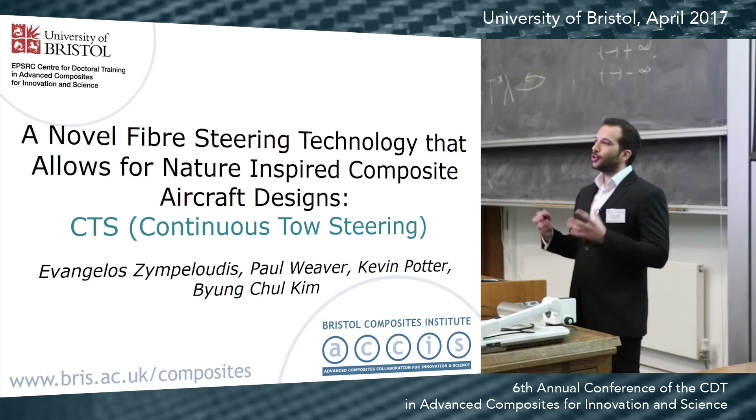All right. Hello, everyone. My name is Evangelos Zympeloudis, and the topic of my presentation is on CTS, or continuous tow shearing, which is a novel manufacturing process which expands the overall design space for composites.

Now, as you all know, composites are only strong in the fiber direction, and we compensate for this in order to give sufficient strength in all the critical directions by stacking layers of straight fibers together. But if you look at nature, we hardly see any straight fibers. What you see here is articular cartilage, a high-tech composite found within our bodies, where, as you can see, not only the density, but also the orientation of the collagen fibers constantly changes in order to adapt to the complex loading condition.

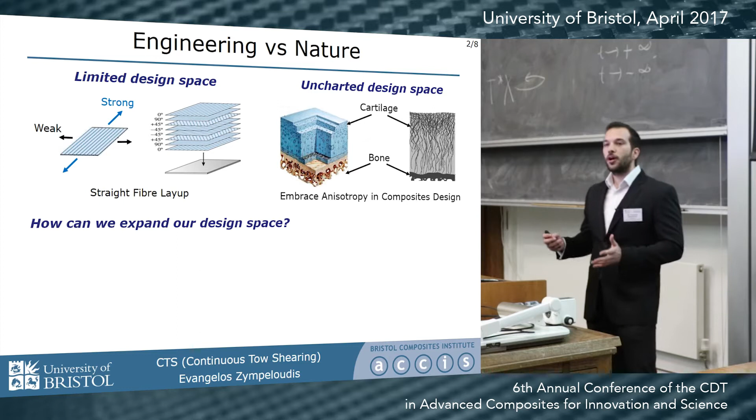Could we then design structures like this, structures which mimic nature and would allow us to improve the efficiency of our components? Well, the first step in doing that would be the ability to control the path of the fibers, something known as fiber steering. Now, fiber steered designs could yield significant performance benefits. For example, what you see here is a fiber steered wing skin, where the optimally steered paths could distribute the load directly onto the wing stiffeners and thus achieve a weight reduction of approximately 10%.

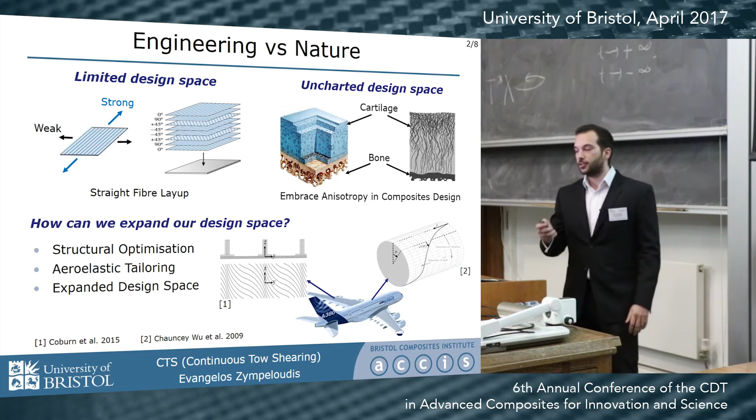Furthermore, as fiber steering allows us to tailor the stiffness of a structure at any given point, it makes it possible to aeroelastically tailor aircraft structures. More importantly, however, since this is a new field in structural engineering, we haven't yet fully explored the expanded design space that it opens.

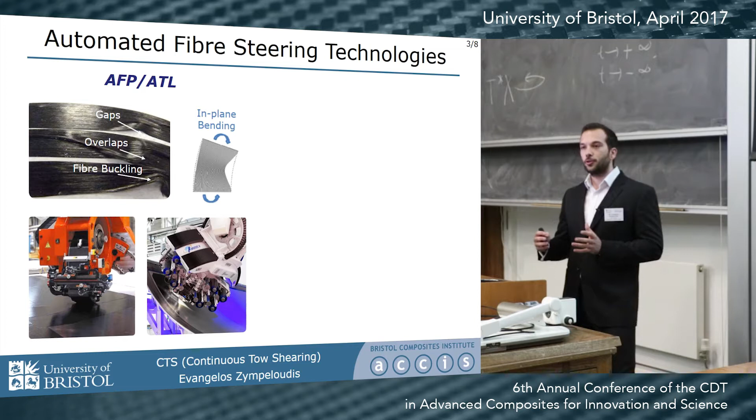Now, this is all great, apart from the fact that modern placement machines cannot produce such optimized designs. And to understand this, we would have to look at the current state of the art in composites manufacturing, the automated placement machines, which basically place bundles of fibers on the surface of a mold using a material deposition head. Now, although these machines are excellent at laying straight lines, they have very limited steering capabilities. And the reason is that they try to bend the tapes in order to steer the path, and this creates buckling, and buckling leads to all sorts of defects.

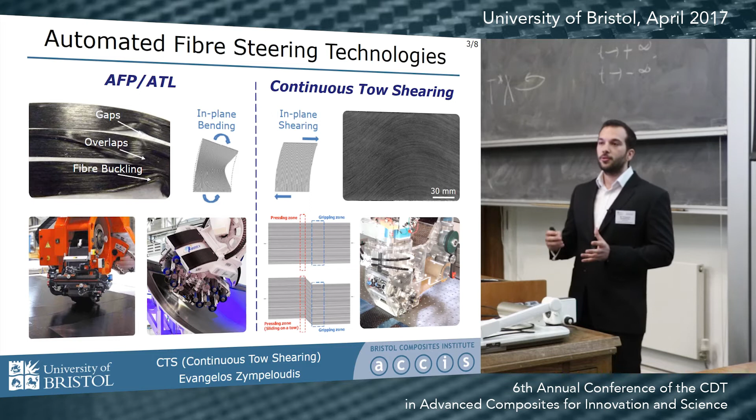Now, to overcome these manufacturing complications, the concept of continuous tow shearing was developed here at the University of Bristol by Eric Kim. Now, CTS exploits the material's shear deformation in order to steer the fiber path and results in no buckling and no defects whatsoever. So since conventional machines rely on bending, there is a strong coupling between the material width and the minimum steering radius. This is the radius that can be achieved without the introduction of significant defects. Basically, what this means is that for AFP and ATL, the narrower the tape, the better the steering capabilities.

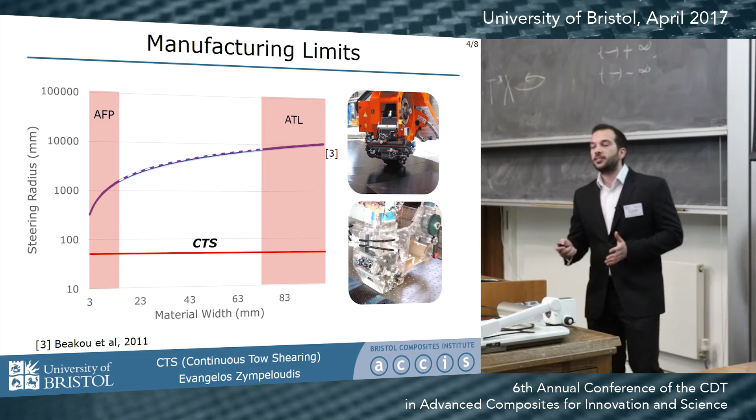On the other hand, since CTS relies on shear deformation, there is no coupling between the material width and the steering radius, and we can exploit this by laying up much wider tapes in order to boost the productivity of the process. So let's take an example. 100 millimeters is a standard tape width for ATL, and this would result in a minimum steering radius of 11,000 millimeters. CTS, on the other hand, can do 50 millimeters. This is several orders of magnitude lower, and essentially CTS is the first process that allows for wide tape layup with steering capabilities.

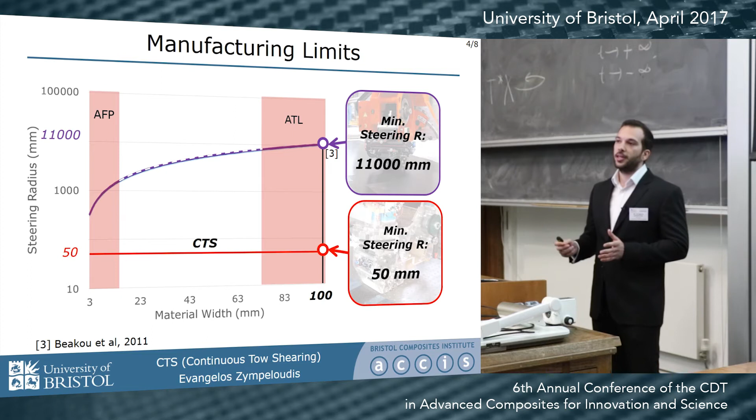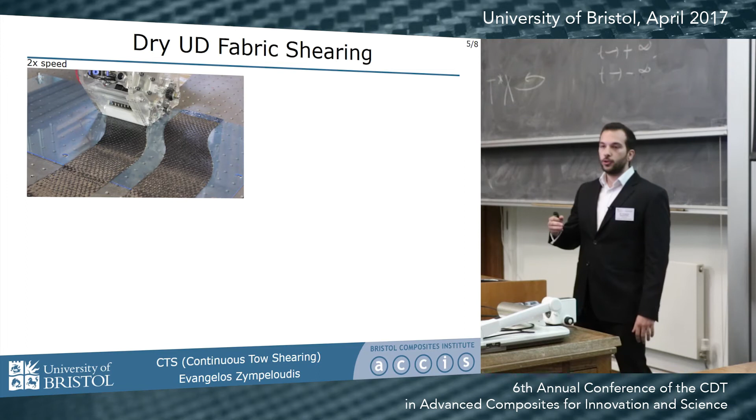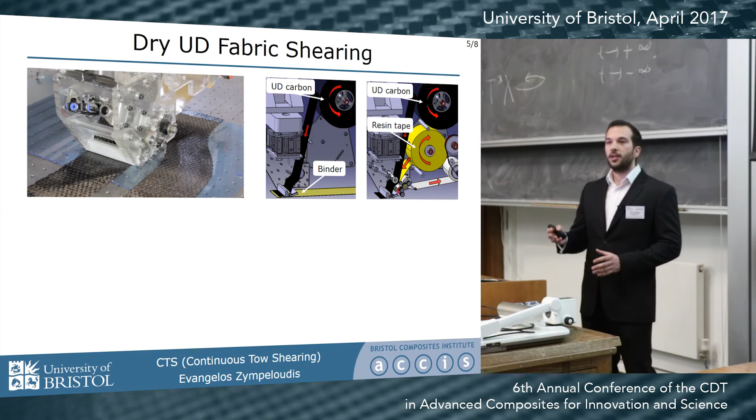Give it a sec. So this is a video showing a layup with CTS using dry fabric. Now, when we use dry fabric, we have two options. Either we can attach the tape on the surface of a mold using binder, or we can attach a resin tape within the head to impregnate the preform. Now, as you can see with the second option, the head layout is much more complicated, but it reduces the manufacturing steps. Now, while shearing dry fabric, the quality is primarily affected by material parameters, such as the weft yarn pattern. And although with these materials we cannot achieve the best quality possible, it is an overall low-cost and very robust process with highly flexible material selection.

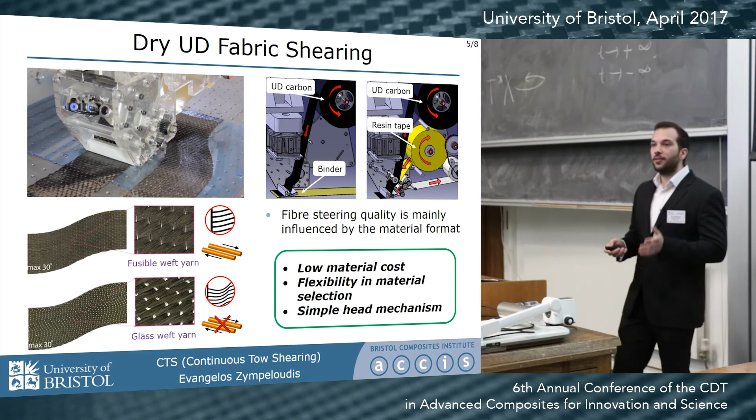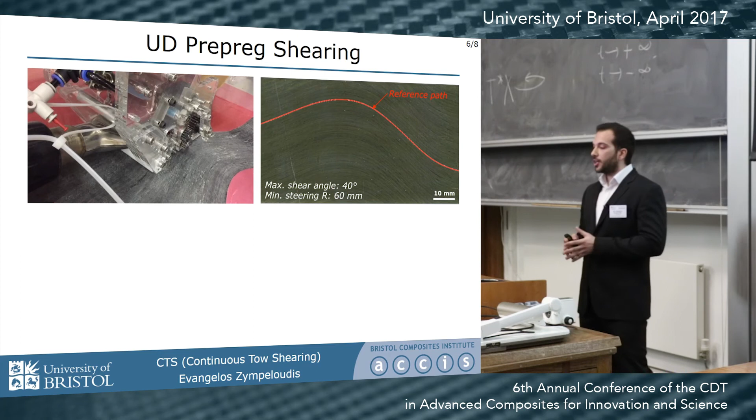Now, very recently, we were able to expand CTS for use with prepreg. And what was key here was the ability to control the tension of the fibers while shearing. Now, with prepreg, we can achieve much higher quality. And due to the high mechanical properties of the material, we can produce components of high structural integrity as well.

So what we have seen is that nature designs in a completely different way to man. And to mimic nature and improve the efficiency of our structures, we would have to escape the straight fiber paradigm. The first step in doing that would be to enable fiber steering capabilities in modern placement machines. And to do that, we have developed the concept of CTS, which operates in a niche application field, as it allows for wide tape layup with steering capabilities, something which was not possible before. More importantly, however, since this technology expands the overall design space, this technology could shape the next generation of ultra-efficient aircraft.